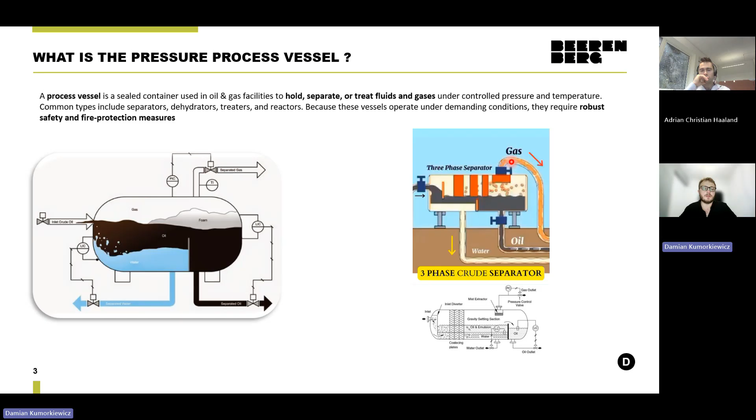Common devices include separators, dehydrators, treaters, and reactors. Because these process vessels operate under certain conditions, they require safety and fire protection measures, very often also with thermal insulation performance.

So how is the vessel made up? In general, either a process vessel or sphere contains a number of items. The main component, of course, is the shell. The shell in general holds the primary pressure boundary and is the largest area of the vessel. From two ends you have a head or end closure, and those components are normally much more complicated because of the curvature, so it's a more complex geometry.

The vessels also contain a number of nozzles and flanges, which are connecting points for upcoming piping and flanges and other interfaces, and for manway entries the vessel contains manways or manholes.

So in these particular items, removability is very important, since from time to time the vessel needs to be cleaned.

Other components structurally support the vessel itself - whether it's vertical, horizontal, or a sphere - we need to use either saddles, skirts, or supporting legs. Saddles are normally used for horizontal vessels, while skirts and support legs are used for vertical vessels or spheres respectively. There are also a number of other internal components, like lifting lugs, ladders, and others.

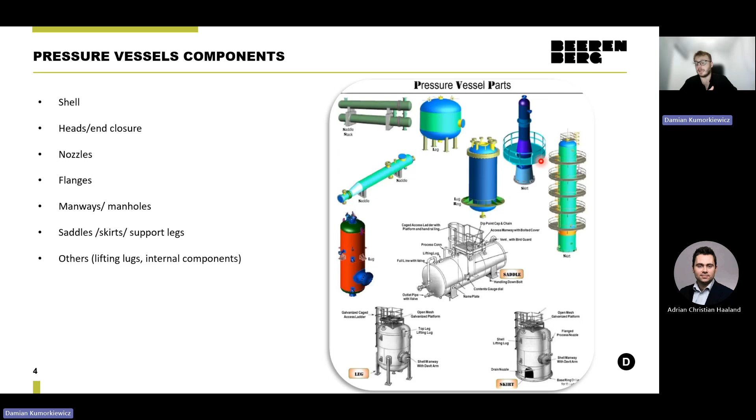Where are these vessels placed in oil and gas facilities? In general, as you know, the oil and gas facility scope is really broad - we have upstream, midstream, and downstream. So there are a number of different applications for the vessel depending on the process the facility operates.

But in general, for refineries and petrochemical facilities, these are normally cracking units, polymerization vessels, aromatics units, and others going through gas treatment and gas processing facilities. There are amine vessels, mercury removal units, and LPG, LNG bullet tanks and spheres.

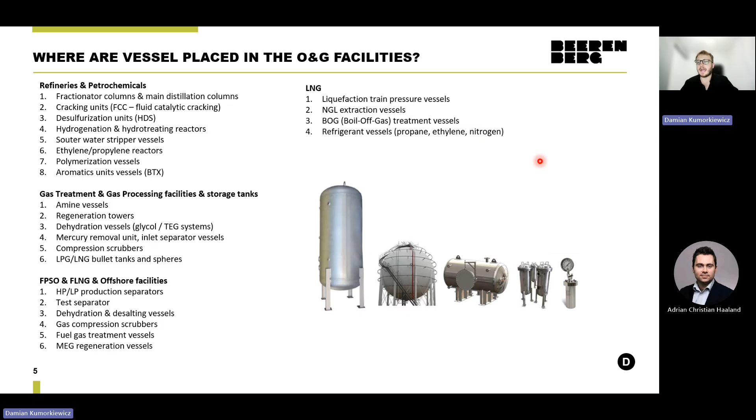Then offshore, this is floaters and offshore platforms - the most common vessels are low pressure and high pressure production separators, test separators, and scrubbers. And the last thing is LNG facilities, where the vessels are normally liquefaction vessels, boil-off gas treatment vessels, and others.

Now, why do we use passive fire protection on critical vessels first? As a starting point, the vessel needs to be in a fire zone, which is nominated by performing risk assessment studies by safety engineers, or if the project follows the API 2218 standards.

But in general, vessels and spheres need overall passive fire protection, because due to the gas containment these vessels are especially at risk from hydrocarbon fire exposure. And if active fire protection fails - which is another type of solution compared to passive fire protection - the heat can cause the vessel's contents to boil and expand in a boiling liquid expanding vapor explosion.

We'll touch on this in more detail in the next slide. Damage caused by the resulting fireball and flying debris can be devastating for the project, so this is a really serious threat.

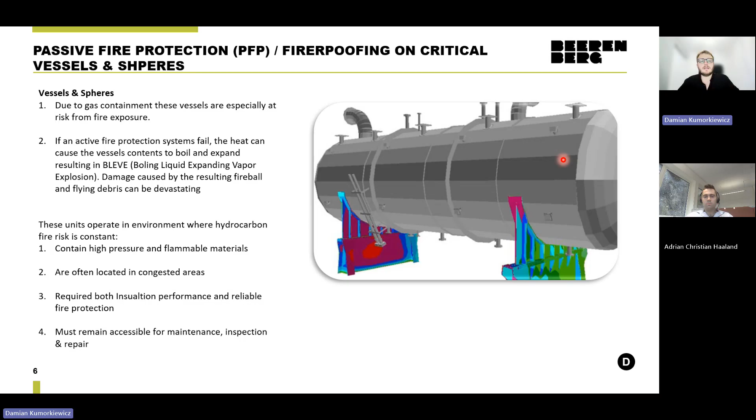So in general, as a summary, these vessels contain high pressure and flammable materials and are often in a congested area, especially in the offshore environment. Very often the passive fire protection material is supposed to be both a PFP material and an insulation material at the same time, and must be made accessible for maintenance, inspection, and repair.

Yeah, so that's the example of boiling liquid expanding vapor explosion.

So as a couple of basic phenomena, it's worth starting with what the boiling point actually is. Boiling point is the temperature at which liquid becomes gas throughout.

Number two, the boiling liquid expanding vapor explosion is caused by a rupture of the vessel containing pressurized liquids above its boiling point. So when the vessel fails, the pressure drops immediately, and the hot liquid boils, generating a large formation of vapor.

And due to this, if the material is flammable, it can create a large fireball and cause very big damage to the surrounding area. So this is a really serious threat.

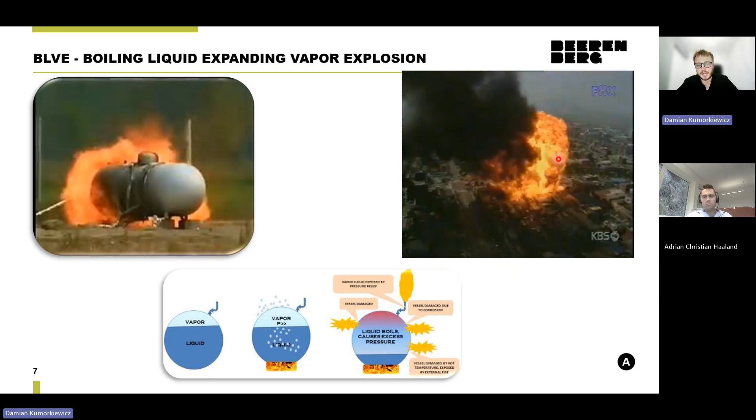We would like to show you one of the many fire incidents in our industry. This is one of the most dramatic. It comes from 1984, November. It happened in one of the LPG storage terminals in Mexico City, Mexico.

As a result, 600 people killed, 7,000 people injured, 200,000 people evacuated, and the terminal was completely destroyed. The end user lost a lot of reputation.

Governmental agencies, of course, being involved. It brought a lot of attention from the media. So it was really, very, very bad event for our industry, and of course for those people, either neighbors or people who have been harmfully affected.

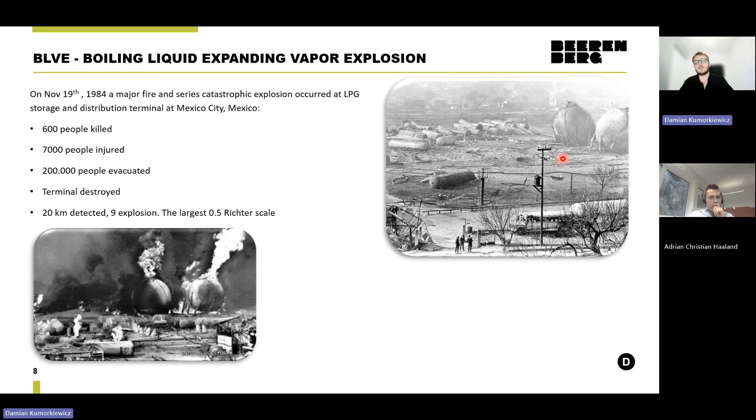So yeah, this is not a coincidence. This is one of the examples which happened in our industry.

Okay, so going forward, what's our typical traditional method for PFP on the pressure vessel? I think this is the good starting point before we move into the Benarx system. So you can divide those solutions into two categories: one is dynamic, and the second is static.

Static passive fire protection materials are like cellular glass shells, which is a rigid product, closed cell insulation material, together with metallic jacketing, for example 316 or 304 stainless steel.

The other solution is PFP jackets, also used many times in the industry for PFP of the vessel. It's made from technical fabrics, and filled with a thermal insulation material as a fire insulation material, which is mineral wool, fiberglass, AES wool blanket, and similar.

The last one is ceramic wool fire insulation. It's quite flexible as well, and it has to be applied on the vessel together with metallic jacketing.

Another type is, of course, the dynamic PFP materials like intumescent coating, the epoxy intumescent coating. It's applied on site by the applicator. It's swelling when it contacts fire, creating a black insulation char, and it's very often used by the offshore industry.

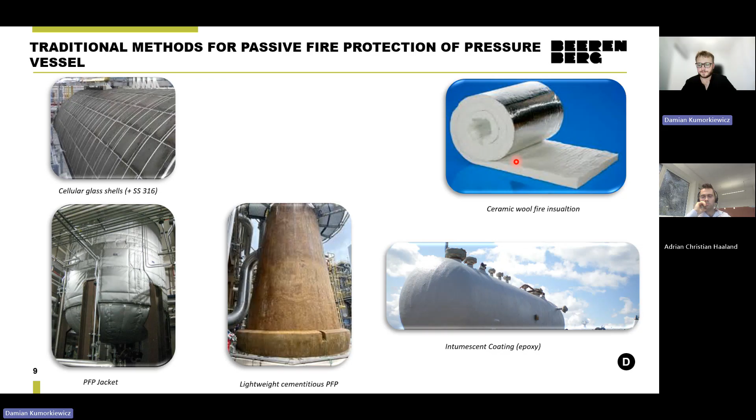So yeah, you have many different systems now on the market. Each solution has pros and cons. But what we see, based on our experience, is first of all corrosion under insulation, a big topic in our industry, in our discipline.

There are a number of locations on the vessel which are susceptible to corrosion, and it could be, for example, the saddles as one example.

Then a congested area, especially in the offshore environment, there's very little space in the production area. There's a lot of surrounding equipment like ladders, decks, etc.

We also see the pressure vessel lifetime is expected to be designed for 15, 20 years. And we see, by the project, they utilize a solution which can withstand only 5 years. So of course, in that logic, the PFP system will be one of the first components to be repaired and undergo maintenance at the first turnaround or shutdown.

Impact resistance: of course, during the shutdown there is a lot of hassle, scaffolding, people stepping in and out, laying heavy equipment, everything is in a hurry. So of course the PFP might be damaged. It's worth taking into account these conditions too.

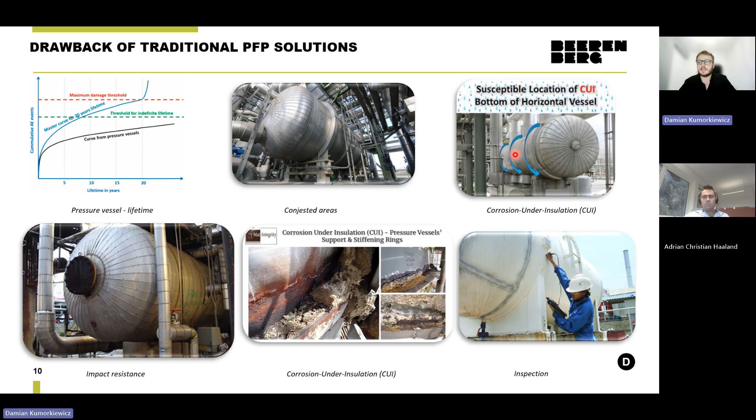So this is our solution. It's called Benarx Epoxy Panel. How is it made? It's made from a perforated plate, stainless steel 316.

Then it's covered with an epoxy intumescent coating, which is calculated based on your fire demand criteria. And then it's applied with epoxy primer and polyurethane top coat on top of that.

And then from the inner side, we attach an aerogel blanket called Oryza aerogel blanket. It's pre-cut, laminated with aluminum foil and glued to the inner side of the panel.

The thickness range depends on the PFP specification and rating, but it varies from 8 up to 40 millimeters. The weight starts from 11.7 kilograms per square meter, but it's directly connected to the thickness. Of course, the higher the thickness, the higher weight is expected.

Surface temperature, in theory, we don't have any limit. We can even go up to 650 Celsius degrees, but that's very, very rare. With one layer of aerogel blanket inside our panel, the surface temperature is up to 250 Celsius degrees, so it covers most cases in the industry. We see that vessels are normally rated up to 200, 220 Celsius degrees.

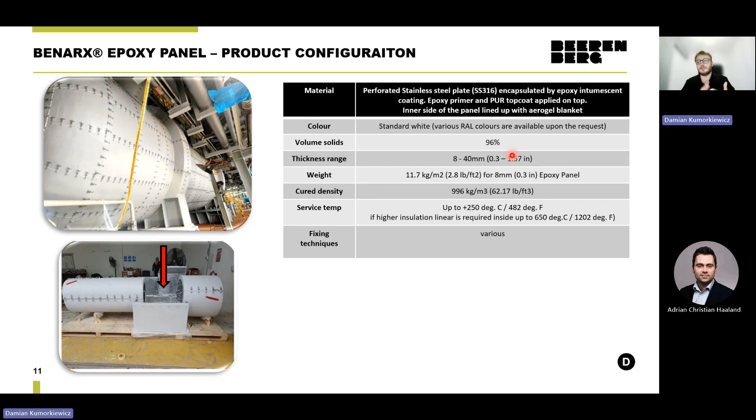Fixing methods depend on accessibility, whether the client wants frequent access, etc., and what's most practical for the installation. But it's locks, banding, pop rivets, or a combination of them.

Since the aerogel blanket is an internal component of our system, I think it's worth mentioning a few words about it. We use this aerogel blanket insulation material, which is hydrophobic, a water repellent insulation blanket. So it's very, very good.

It can be used as a standalone product for hot conservation and acoustic insulation, or cold conservation for the vessel. So if you have any of this demand, feel free to contact us, and I'm sure we will be able to help you. It's widely tested and certified.

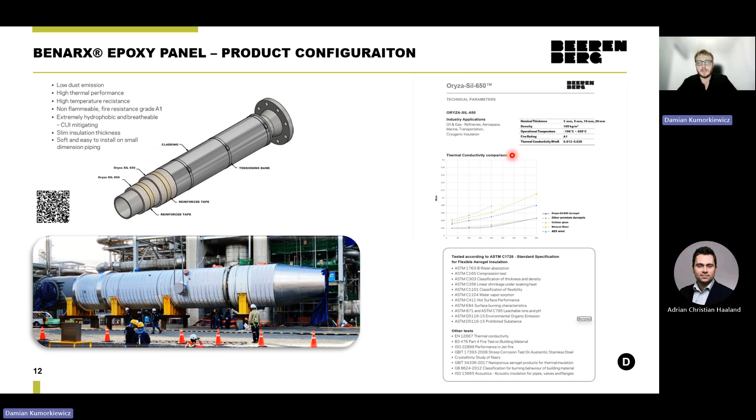Here you have a list of the certifications as well. It's manufactured in many different thickness variations: 3, 5, 10, and 20 millimeters. This isn't a major topic for the webinar, but we think it's worth mentioning.

So what are the details of the fabrication process? It's not rocket science fabrication. In general, when we start the fabrication, we start with a skeleton, making it according to the object shape.

Then we apply the epoxy intumescent coating according to the relevant thickness. We apply the epoxy primer and polyurethane top coat with a roller inside. And then it needs to be dried, packed, and shipped to the client. That's the whole process.

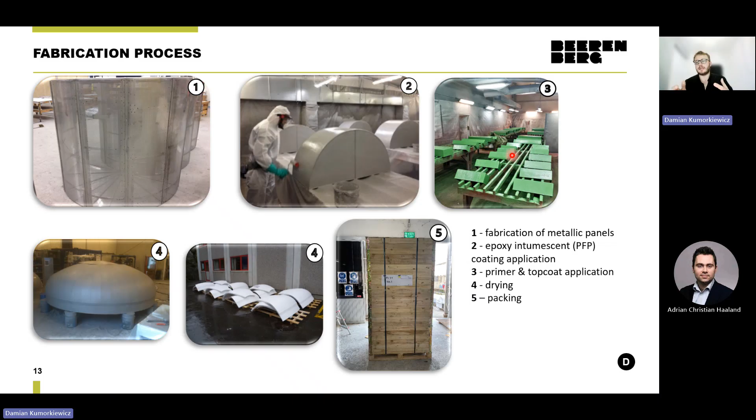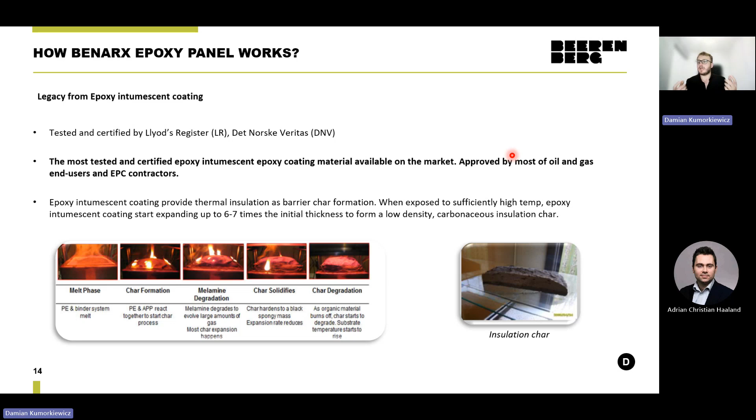How does our panel work? In overall, if you're familiar with how epoxy intumescent coating works, then you know how our panels work basically. We use Chartek as an epoxy intumescent coating, so our panel works exactly the same manner. In contact with fire, it starts reacting, expanding, creating the black insulation char. We protect the equipment against the fire.

Next, product configuration. We have a number of components which can be attached to the product, but not all of them are mandatory. We use them when necessary. First, air gap—that's a small distance between the metallic substrate and our panels.

For example, a 20 millimeter air gap. It's a great solution against corrosion because water will not be trapped between the panel and the metallic substrate. It always goes to the bottom of the vessel and will be drained out from the system by fire-rated drain plugs.

Then Teflon spacer, together with supporting rings. Sometimes we need to attach supporting rings, which are mechanically fixed around the vessel, so no welding. We do this especially for vertical vessels, so we need to attach the panel somehow to the vessel using these supporting rings with Teflon spacers.

Watershed, yes, it will allow water to run off. Each panel section is equipped with a tag plate. We can incorporate the inspection hatch in any panel location. The bottom section of the panels is always equipped with fire-rated drain plugs, which drain water out from the system.

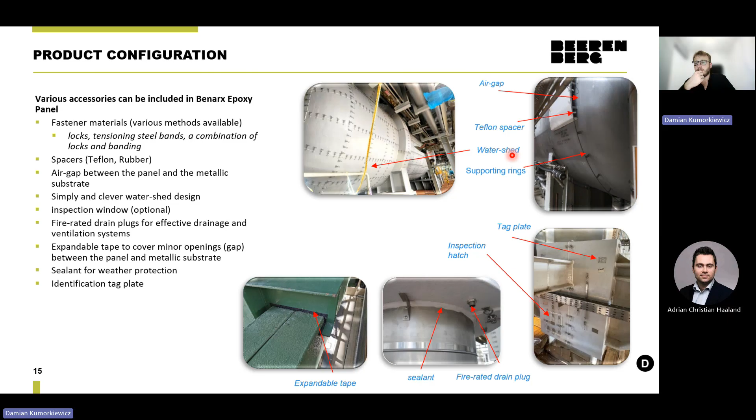Between the panel sections, it will be sealed. The joints will be sealed with a recommended sealant, and any minor gaps between the panels, up to 5 millimeters, will be filled with expandable tape.

Since we already explained a little bit how the vessels are made up, we would like to show you how our product fits into those vessel components. Here you have an example of panels on the tank shell. Then you have the epoxy box, which is exactly the same product as a panel, just with different geometry on the saddles, on the sliding saddles. Then you have the nozzles and the manholes.

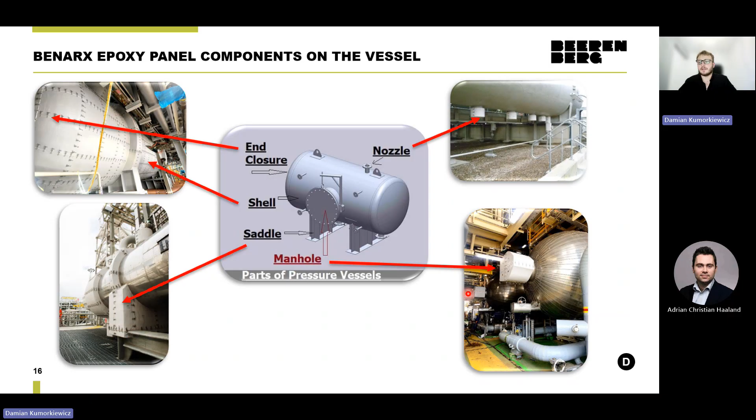What might be your additional questions? Why do we have several parts? In general, we have certain factors we need to follow when we design those panels. The number of sections or panels depends on the fireproofing thickness, based on the application, based on the weight restriction, based on the surface area to be insulated, based on the accessibility. So there are a number of factors we need to follow.

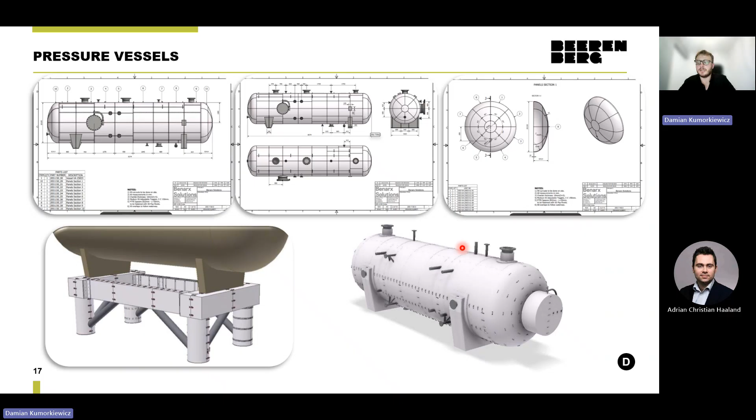Our standard weight restriction is 25 kilograms per segment or per section. If you have a lower demand, for example 20 kg per part, then of course we can follow that, but we need to increase a little bit the number of sections in total. The part will be smaller, but there will be more quantity of those panels.

So especially for large vessels, you need to take into account the wind speed and additional conditions. So we normally use supporting rings around them, which are mechanically fixed to the vessel, and between the rings and the vessel there's a Teflon spacer, and then we attach the panel.

So it's a very similar fixing method to what you use, for example, to insulate a vertical vessel with mineral wool. You need to use the supporting ring as well. So, yeah.

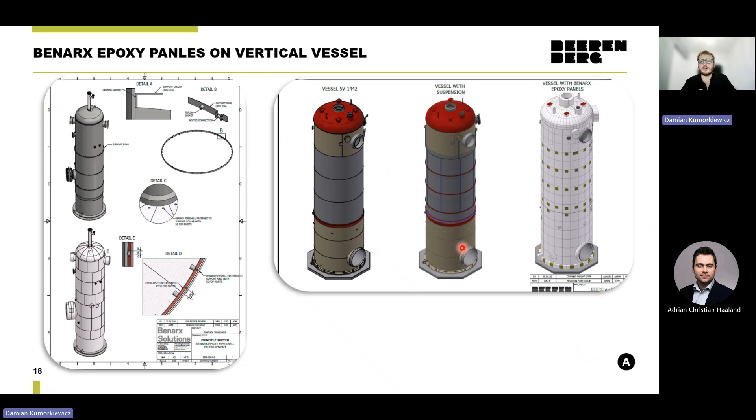All right, Adrian. Yes. So I will talk a little bit about the testing and certification that we do for our products. Why do we do it?

Well, first of all, it's our license to operate. We are not permitted to deliver our products in most projects without appropriate fire testing and certification. Number two, we always invest to improve our products, reduce thickness, reduce weight, reduce cost, reduce installation time and TCO for the clients. Here's a short list of some of the testing that we do for our Benarx series products.

For hydrocarbon fire, we typically test according to BS 476 and IMO 754. We've also done some GOST and TR testing historically. Of course, one of the more recognized standards, UL 1709, we have testing and certifications up to above 3 hours. We've also done fire stream hose tests, which we will come back to a little bit later.

And then we have our jet fire testing, both regular according to ISO 22899 and high heat flux, so-called 350 kilowatt tests. We've also done some sporadic testing within cellulosic fire for building fires. We've done explosion testing. The presentation says 1.2 bar, but we recently did testing up to 8 bar there. So we are quite advanced on that front.

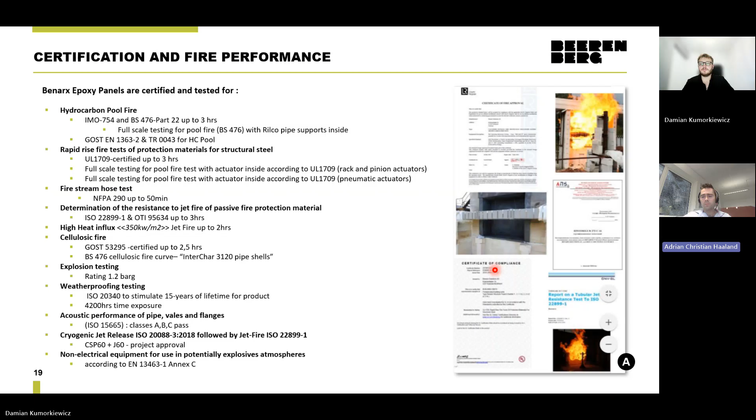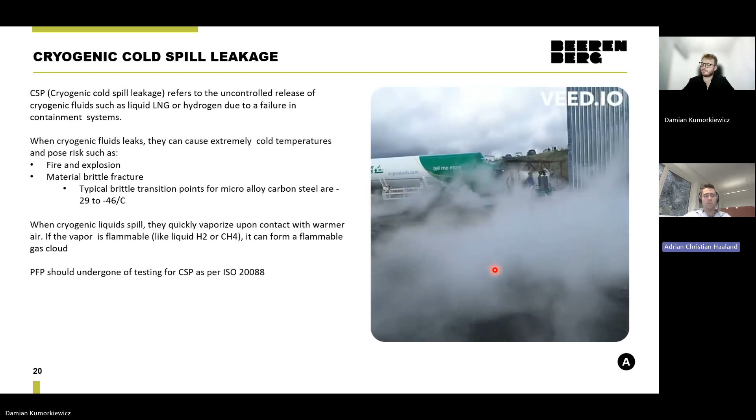Here's an example, a short video taken from outside the test facility during one of our previous cryogenic tests. For one such test, we are utilizing almost a full tanker of liquid nitrogen, and this can also be done with hydrogen if needed. The specimen is subjected to a jet of liquid nitrogen, typically for 1 hour.

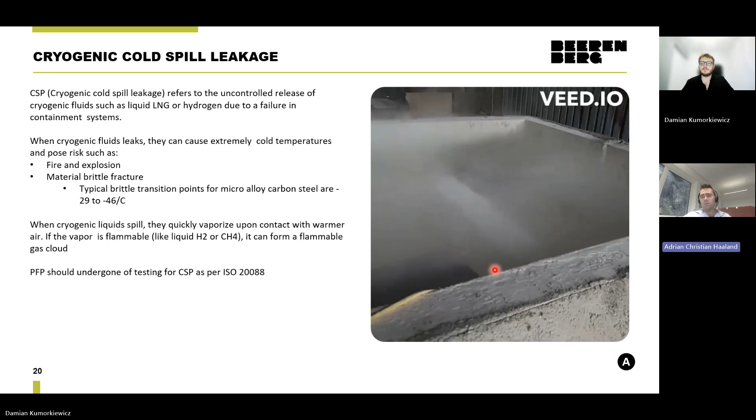It's exposed to temperatures down to -200, and after 10 to 15 minutes of completing this cryogenic test, it is subjected directly into jet fire, going straight up to 1100 degrees and completely engulfed in flames.

Why do we do these tests? This test is meant to address the concern that a spill of liquid natural gas will cool the steel temperature below its brittle transition point, to the point where the metal can actually be subjected to brittle cracking or failure due to the cold temperature when exposed to shocks and other loads. Yeah, next slide.

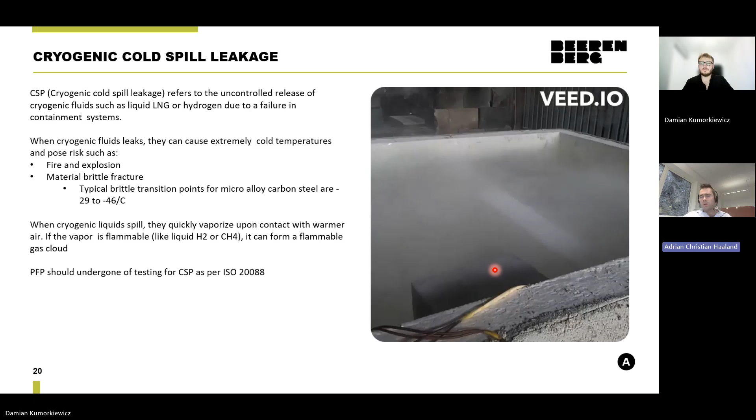When it's detonated in the back end, the pressure wave builds up, and typically the more congested these process areas are, the higher the pressure will build up. So the more complexities, piping, flanges, valves, structures and obstructions you have in the process facility, the more the turbulent flow of gases will mix and the higher the explosion pressure will build up.

The test specimens are located at the end, and they have to withstand this explosion load, both the impact and the subsequent drag load.

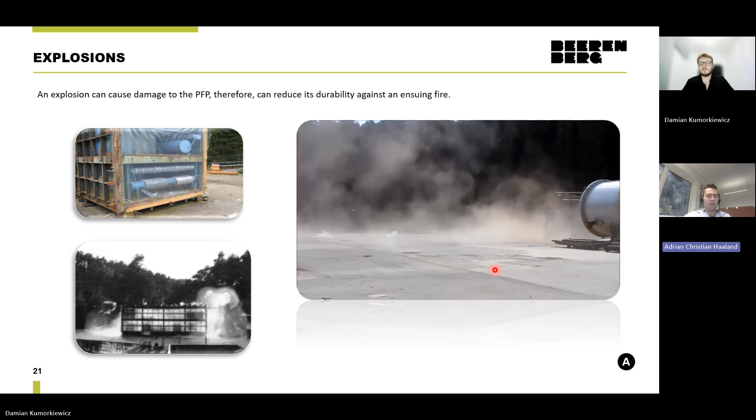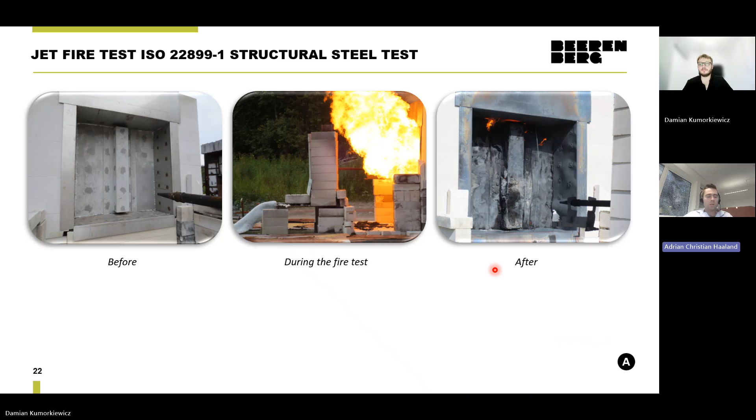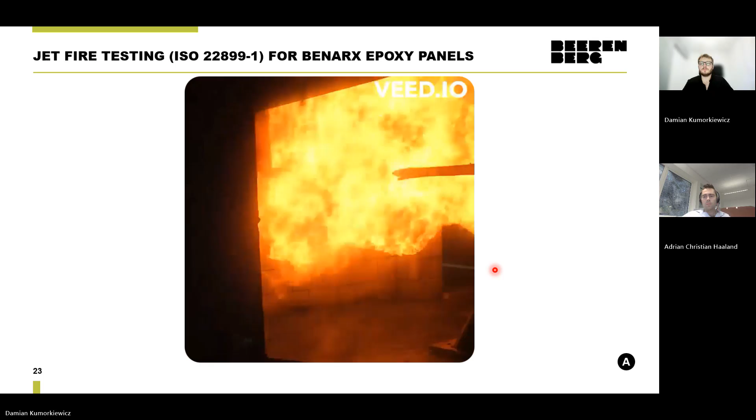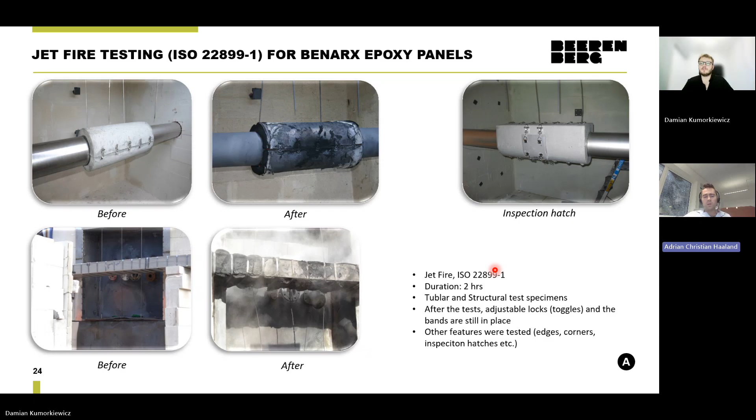And on the bottom here, you can see an example of a cable tray configuration test where we actually run electrically charged wires inside the cable tray to see that they could withstand the rated current during the fire scenario.

For this test, we used 7 tons of liquid nitrogen. That's 2/3 of a full tanker truck. And after 1 hour of this frost inferno, it's going straight into the jet fire. And it has to withstand.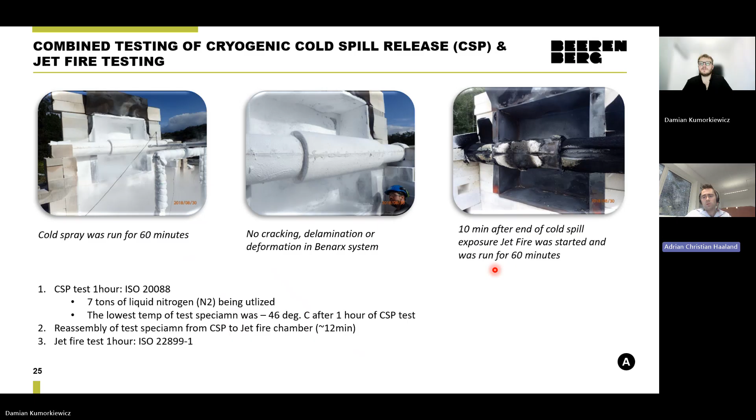It cannot fall apart, crack, or delaminate. It has to prove integrity for the full fire duration. In this case, the jet fire test was run for 1 hour, but we've run for up to 3 hours of jet fire testing subsequent to 60 minutes of cryogenic exposure.

Yet another test, CSP and jet fire test. This was for the thick pipe specimen, so up to 40 millimeter. And we also do thin specimens. This was part of a test program for Chartek 2218.

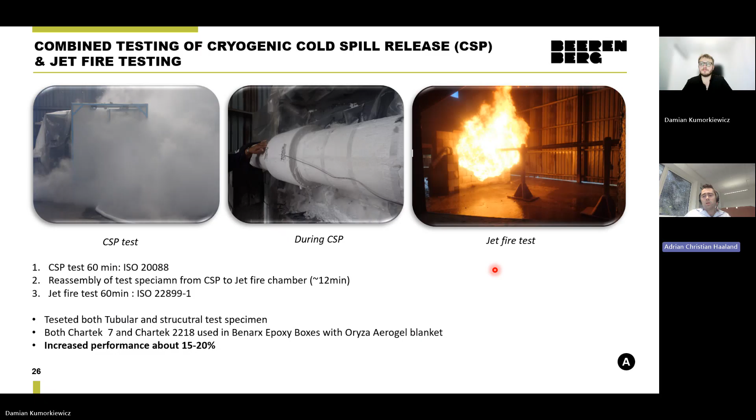The goal of the test program was several factors, but one, to transition into a boric acid-free system, which is an HSE concern for some operators. Also to reduce costs by going into more efficient technologies, reducing thickness and complexity and cost of the system. Due to the thickness reduction and the higher distance between lots and bands tested, we achieved almost a 20% reduction in cost for the product just by transitioning Chartek technology.

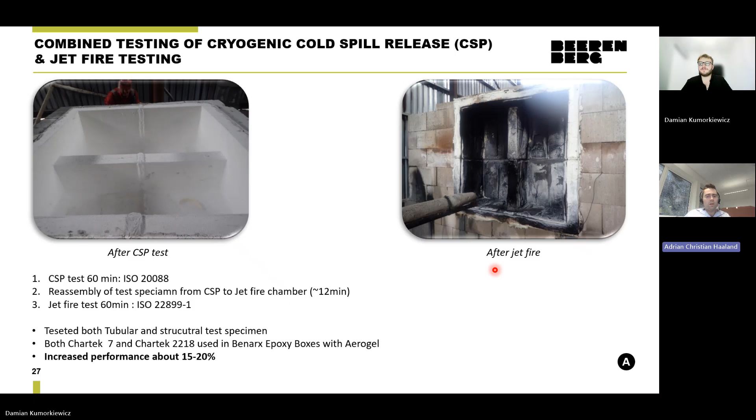This is for the same program, just for the structural specimens. Here as well, 60 minutes subjected to the liquid nitrogen, and then 60 minutes of jet fire in this case.

New member of our test reports, the stream hose test. This is quite a new standard for us, I would say, even though it's been a couple of years now. It's an American type test designed to simulate the effect of an impinging fireman hose on the specimen.

So in the case of fire, there might be cases where water cannons or active fire measures may be taken. The purpose of the test is to see that the impingement of the fire hose water jet does not compromise the system mid-fire scenario. So in the test, we're doing 20 minutes of jet fire, 10 minutes of water hose spray, and then another 20 minutes of jet fire. The system has to withstand the water spray without cracking due to thermal shock or that type of thing.

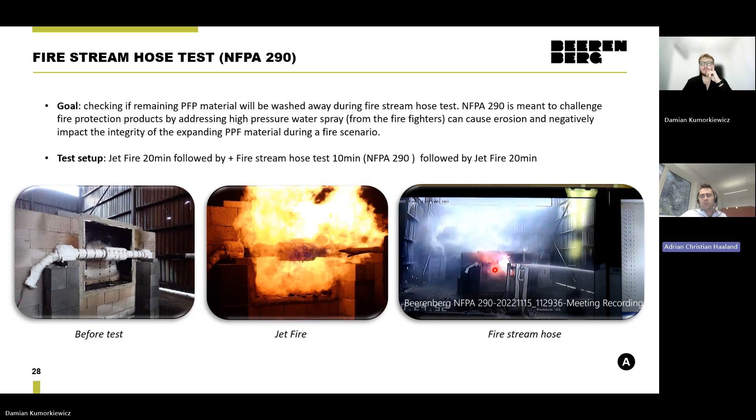The thing to note here is that even though you have a product that can withstand a regular jet fire, the 100 to 200 degree hotter temperature normally encountered in a 350 kilowatt jet fire test actually represents something like a 50% increase in heat flux.

So we've seen fixing materials that stood 2-3 hours in a regular jet fire be burned away in the course of 15 or 30 minutes.

In some cases, these tests reach temperatures above the melting point of certain stainless steels. So it's on the edge of what a system can do, and you cannot extrapolate from regular jet fire testing to this type of test. They have to be performed on their own merit.

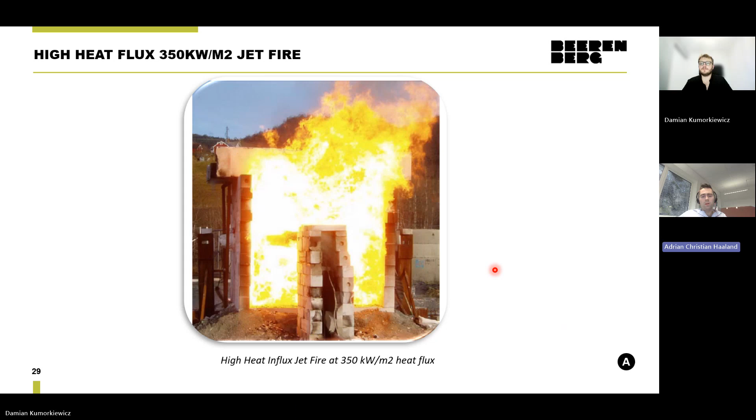Some examples of cyclic testing, weather exposure tests, to explore different types of coating systems and sealants and see how they perform when subjected to UV light, rain, salt, and cycling temperature.

We've also done some testing on repair systems. The concept here is that we've tested damaged PFP encapsulated by our system, so that in the case that you have damage, cracking, or delaminating PFP, from a fire protection standpoint, you don't actually need to remove it before installing the Benarx epoxy system.

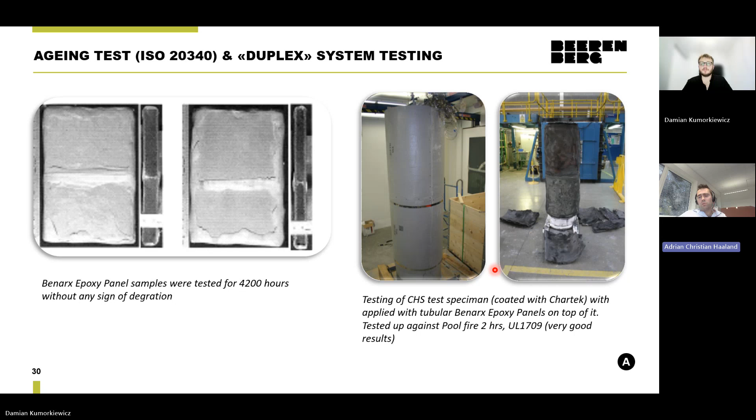You only need to remove them if you have concern about corrosion. If the corrosion protection primer and integrity of the system is good, you can actually just clamp on panels and boxes and avoid the chiseling and removal of the wet applied system.

There's a lot of documentation that goes into deliveries like this, a lot of design, a lot of engineering. We supply our standard documentation package as a default. It includes data sheets, installation manual, drawings, PFP thickness reports and certificates for the projects, weight reports, certificate of conformance, and packing list.

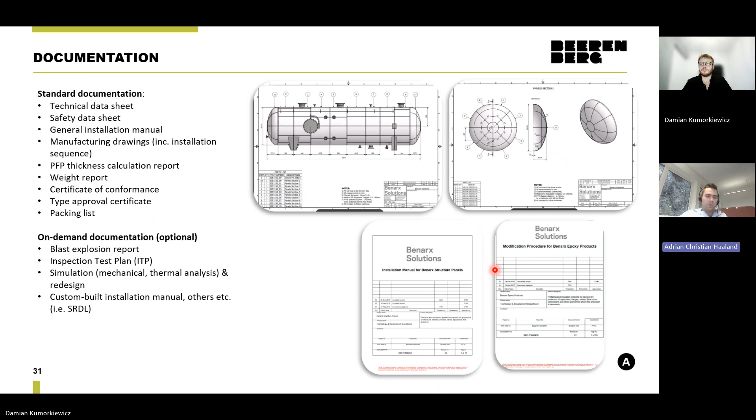Of course, many new build yards have much more extensive requirements for documentation, which is required from the project, and we follow those if they are required. But of course, they have an additional engineering cost in terms of hours. So we would like to recommend keeping it simple if possible.

In the design, we also do some explosion testing for those cases where explosion loads are concerned. Different boxes and panels have different sizes, supporting mechanisms, shapes and geometries.

So we run finite element analysis to address that. The explosion load that we run in our tests is adequately captured in the strength of the geometry that we deliver in the project. Here you have some examples of a vessel skirt and a pressure vessel.

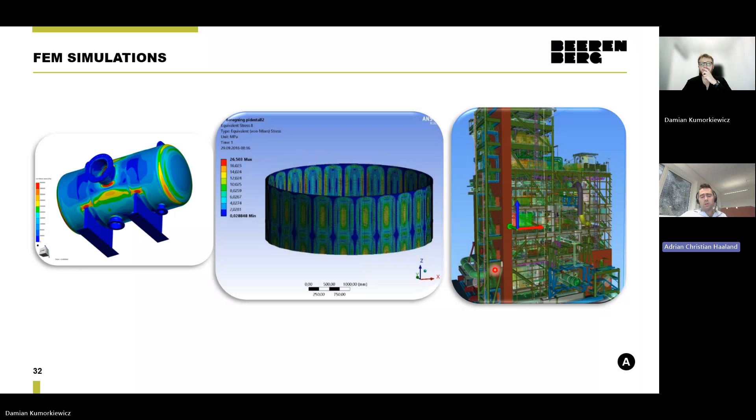Thank you very much, Adrian, for your engineering and technical walkthrough. Now we can briefly explain how we deliver our products.

It starts with design methods, which we'll touch on in detail in the next slide. But when it's defined and we measure or design based on the 3D model, then we start doing the PFP thickness calculation. We start preparing the agreed project documentation. Once everything is in line, production, inspection, then we ship.

The installation also needs to be agreed. Normally we see clients prefer to use local workers so they can easily install our product. Sometimes we are requested to supply the field supervisor. If everything is installed correctly according to the deadline, then we sign the papers.

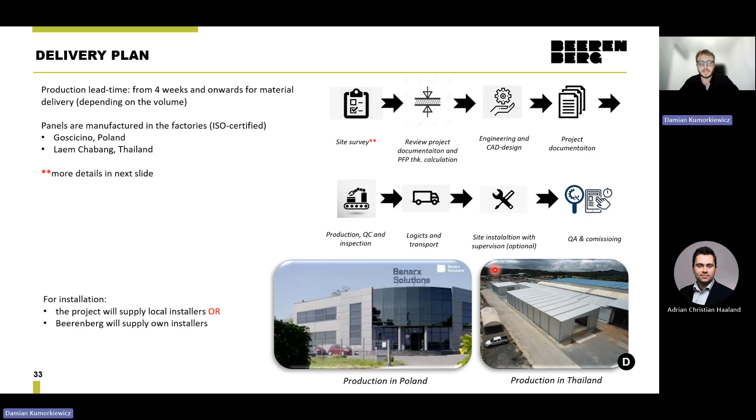On the bottom of this slide, you can see photos of our factories. One is in Poland, and the second is in Thailand. So we are prepared to supply demanding volumes with quite tight delivery dates. This is for us bread and butter.

When it comes to the design methods, as partially mentioned in the previous slide, we have a number of solutions, so we will not leave you alone.

In general, we can utilize certain models. First of all, we can design those panels based on 3D models, like from your Navisworks. We see the correctness and quality of the 3D models improve every year. This is not like 10, 15 years ago when a valve was represented by a rectangle, for example. Now they've become really, really good and accurate 3D models.

It could also be 3D scans, either from the client or from our side. It could be point clouds. It could be field measurements or just structure drawings with site pictures.

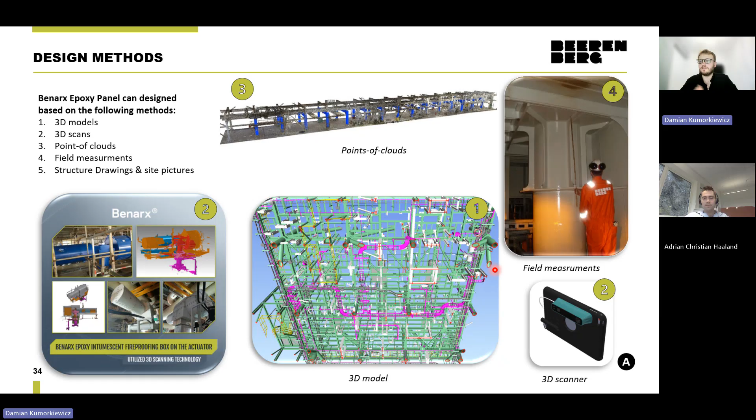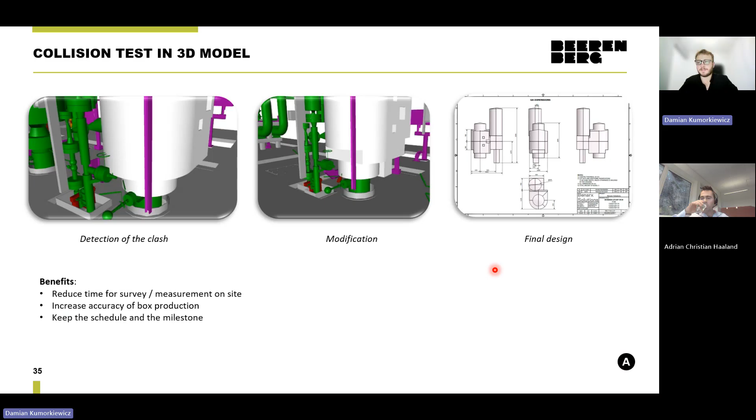We can also do the collision test in your 3D model, or we can send you the 3D model of our panels, and you can incorporate it into your 3D model. We are flexible, but the goal is to detect any clashes, especially for offshore projects that are concerned about that, because they're concerned about the PFP thickness, the weight, if it fits into the very congested area with very little space.

Except for the material delivery, of course, we are able and prepared to provide you the service capability. We have a number of models.

We can send you a field surveyor still, despite it being a traditional method. It works pretty well for complex scopes, for large vessels, for example. It's just easier sometimes to send a guy and measure it on site and discuss all of the nearly impossible scope of work.

For some projects, we can also supply our labor, our installers. However, we see the bigger and bigger trend that projects prefer to use the local manpower component, not just because of the price, but also because of local content usage requirements by a government. So we are definitely able to help you with this as well.

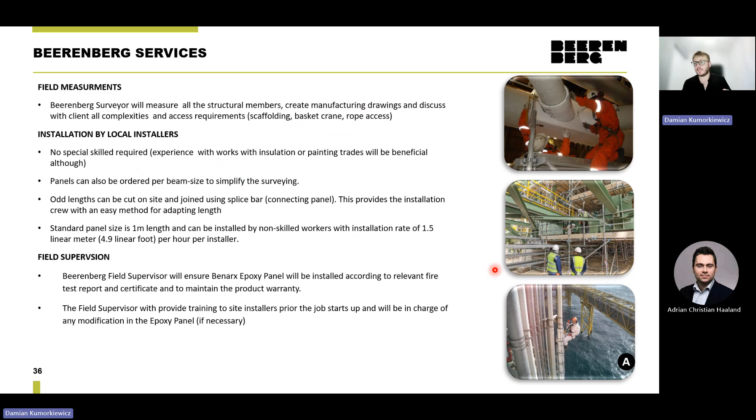And we are quite often requested to supply the field supervisor. The field supervisor will train the local workers, and also the end user workers. The supervisor will supervise the ongoing works, and in case of any modification to be done on site, that person will be in charge of this activity.

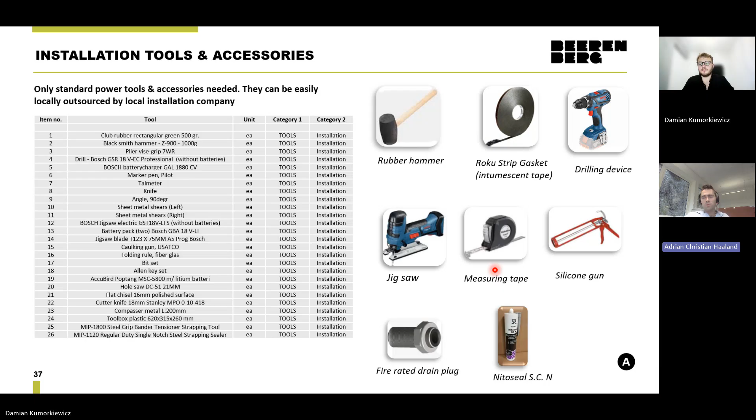We have different models. As Damian said, we are flexible, so we can either supply the full installer toolbox for the project, so you will get all the tools pre-packed and ready, or we have cases where the client wants to procure the tools locally, maybe due to import restrictions or local content requirements, and we can provide a list and supplier names of tools advised. So if the client wants to do it themselves or if we should send the tools, we can do both.

One concept that I would like to elaborate on a little bit in the installation part is the flat pack panel. We have had some projects where instead of custom designing and fabricating everything, we're actually sending standard building materials. We're fabricating standard panels, standard angles, standard latches, etc. for the clients, and they will cut on site and adapt to the field conditions.

This might be good if you have a low quality model, so there's a high risk of clash, or in cases where you have large surfaces, you can use the flat panels efficiently. Or on some structural nodes, manholes, nozzles, etc., you can actually fabricate boxes on site without the need for surveying. This, of course, adds to the work on site compared to the case where everything is pre-designed. But it is a concept you can use if labor is cheap and you don't have a POB concern. It's possible to be quite flexible on the design and get a cheaper material price.

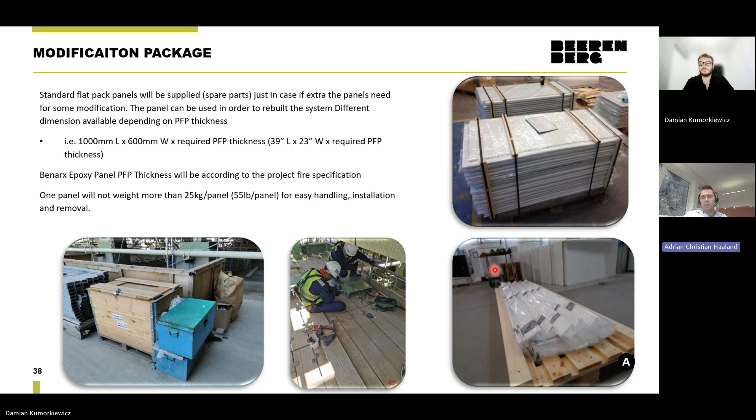All right, thank you, Adrian. If I would be an end user, EPC, or insulation contractor, the most interesting part for me would be the case study, because hopefully we will be able to give you case studies that might solve your potential problems or issues on site. So the first case study is from a gas processing plant in Norway.

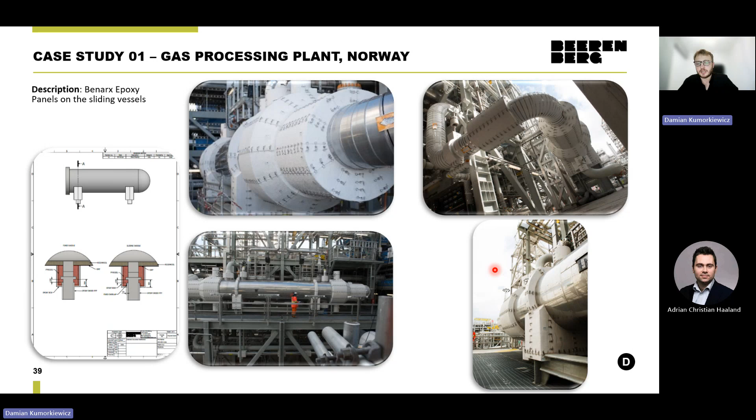We supply the panels of the sliding saddles. As you probably know, sliding saddles have this movement up and down from 5 up to 10 millimeters due to the thermal expansion of the vessel. So we need to accommodate this movement, and we need to make sure that the panel will be big enough to accommodate that movement. Here you have this example where we supply those panels of the sliding saddles and also associated piping with the flanges. The tank shell was fireproofed with a fire insulation material with a metallic jacketing. This is a great example of the hybrid PFP system.

Case study number 2 is for this vertical vessel. The top of the vessel contains the bolted connections, so they need to have access from time to time to this bolt area. That's why they use our box assembly solution on top of that. It was quite a large box, and the remaining area down to the bottom was fireproofed with a wet applied PFP.

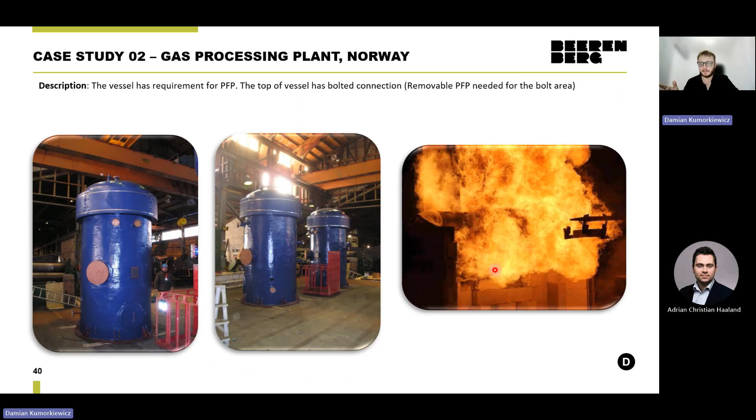This is one of my favorite case studies, a little bit unusual. This is for an offshore platform in Norway. We fireproofed around 60% of the vessel, so only the bottom section of the vessel remained uninsulated. The reason is related to the boil-off gas behavior. When you insulate the entire vessel, the tank becomes too cold, which can produce an excessive amount of boil-off gas. To balance this, the project wanted to keep the bottom section of the vessel uninsulated.

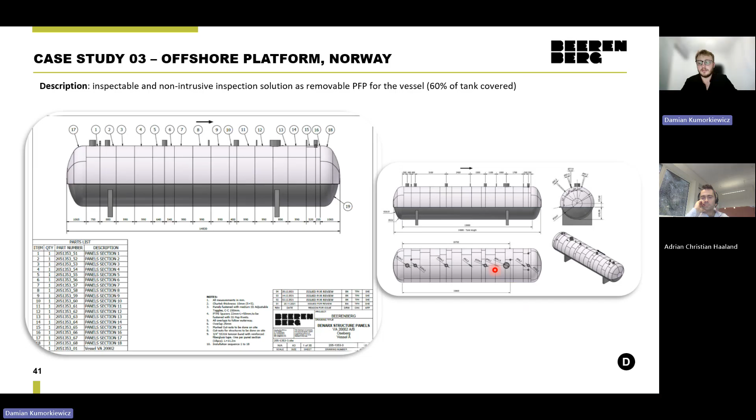So we supply these panels on this markup area of the vessel, and apart from that, on the client side there's very little space, very complex area, tight spaces. It was pretty tight deadline as well to supply our solutions.

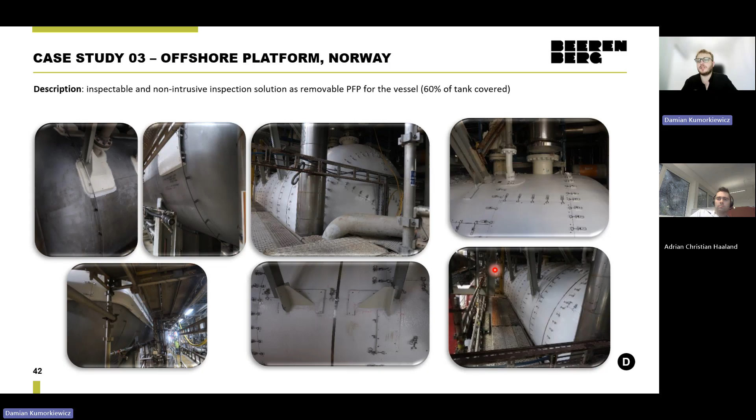This is how the outcome looks like. We had to utilize the supporting rings with the Teflon spacers due to the large vessel. If I remember correctly, the length of the vessel was nearly 15 meters with a diameter over 3 meters. So quite a lot, and the operating service temperature here was around 120 Celsius degrees. We had to do some on-site cuts, openings, and patches to accommodate all these details. Here are remaining photos from that project. Overall, the client was happy.

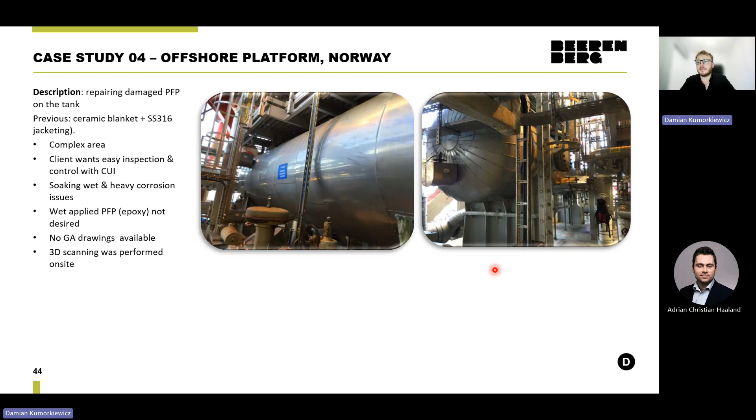Another case study, this time we repair damaged PFP on the vessel. What the client used in the past was ceramic wool insulation with a metallic cladding on top, but it was fully corroded, fully soaked with water, very, very heavy. Once the client removed that, we came into the picture. The small starting issue for us was that the client didn't have drawings - the drawings had just evaporated. So we had to do 3D scanning, and based on this 3D scan, we got the 3D model. Due to the urgency of the scope and potential grit danger for people and machinery, surface treatment with a wet applied PFP was an option the client wanted to avoid, and it was a really complex area.

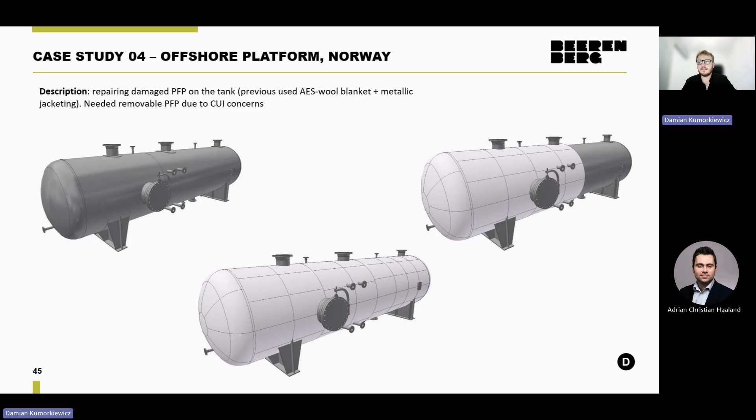So here are our panels on those tanks after the design, and here's a picture after the installation. We managed to fulfill all the expectations, and the client was pleased with the overall performance. Worth mentioning that some sections, like the saddles, we didn't have to fireproof because they'd already been fireproofed with epoxy intumescent coating a long time ago. So here you can see the interfaces too.

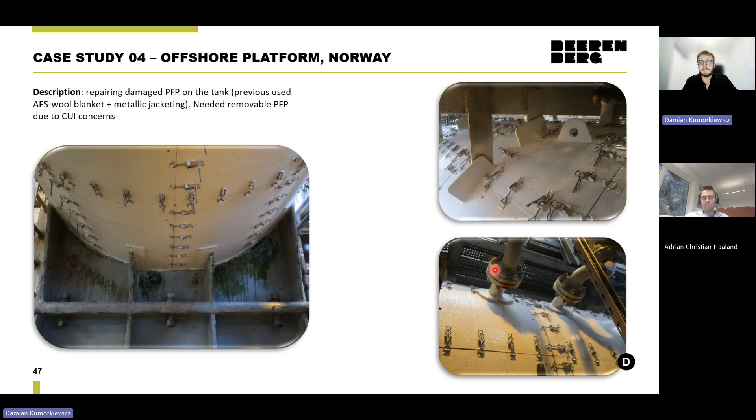Another project, now we are moving to the Netherlands, to the Benelux. We are in a refinery for our good customer. We supply panels on the components called pre-filter and coalescer. Those vessels were already insulated with mineral wool, I think it was 100 millimeters thick if I remember correctly. These vessels also contain heat trace, and heat tracing is vital for process stability, to maintain the temperature, avoid fluctuation, and maintain the viscosity of the fuel they process inside.

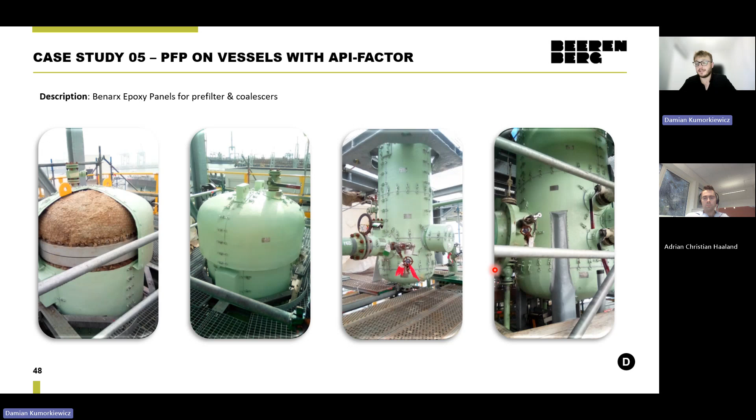Now we are changing continent once again, so we are flying very quickly today. We are in Australia now. So this is the Benarx Epoxy Panels on the bullet tank.

Really large vessel. They have a requirement for high heat flux jet fire, 30 minutes, with a blast requirement of nearly 0.3 bars. Not super high spec, but not so low as well. We fireproof the tank itself together with associated components like the nozzle and the flanges. However, the saddle was fireproofed with epoxy intumescent coating in the yard by the local applicator.

There were a couple of vertical vessels that we needed to fireproof, only the skirt access holes. You can see here nicely on that picture.

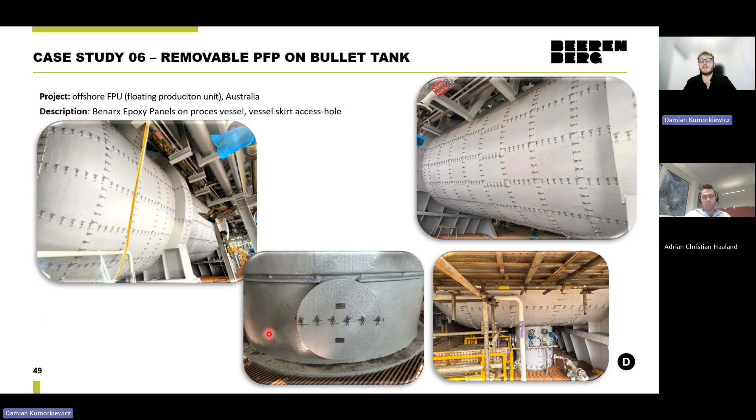The seventh case study is from South Korea for one of the petrochemical facilities. Historically, they used cementitious PFP. I think the thickness was 80 millimeters, if I recall. And it wasn't in good shape, in good condition - it started delaminating and deteriorating. So the end client wanted to fix it as soon as possible.

The area to be fireproofed was 6 meters tall. The diameter of the skirt was around 4 or 5 meters. So we fireproofed this with our panels with only 8 millimeter thickness, the lowest possible thickness we can offer. Successfully delivered and installed.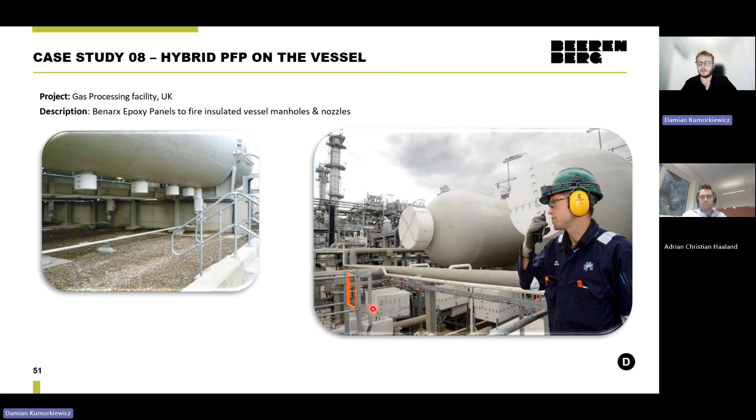As you can see on the left picture here on the top, the vessel itself is insulated with AS wool. It was a significant high operating temperature on this job, so we also had to keep straight in terms of designing all the transition areas to avoid temperature exposure of the epoxy. Of course, the epoxy has a limit on what it can be in direct contact with, so we need to insulate and transition in an appropriate manner to avoid heat ingress.

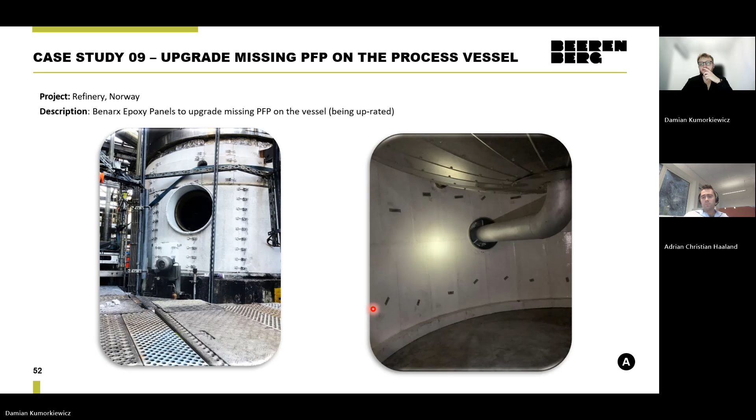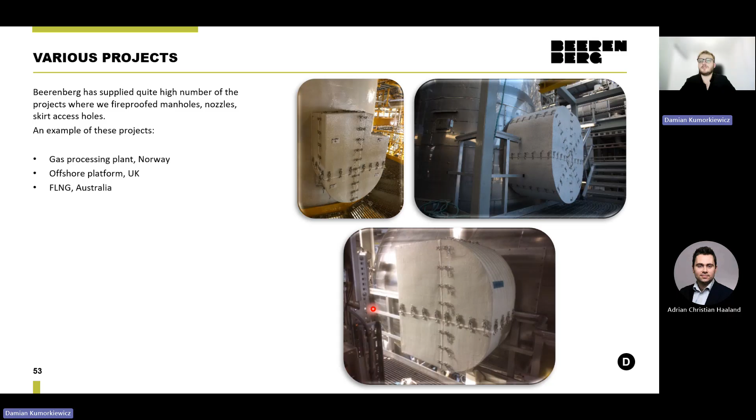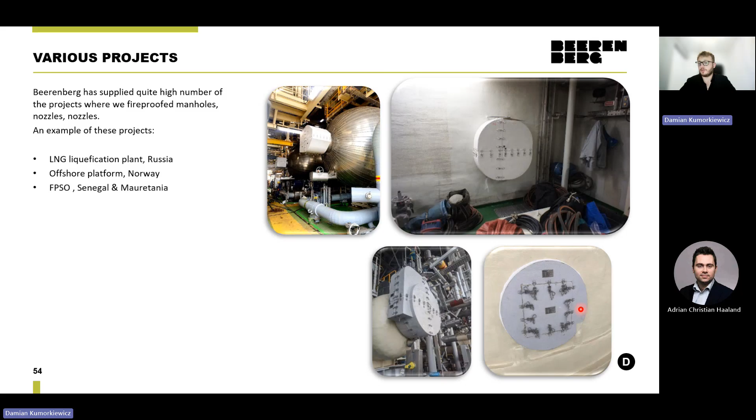Similar cases, this time from an LNG liquefaction plant, offshore platform, FPSO, majority for the PFP of the manhole. Here you have an example of the removable PFP with our boxes on the skirt access holes, and this is a manhole in the bulkhead - slightly different application.

All right, worth also showing how our product will be lasting over time, in a 10, 15, 20 year frame. Of course, this is not easy to get from an end user due to many different requirements like data protection, etc. But we managed to get some site photos of our product after certain years. Maybe not from the vessel, but we would like to show at least what we've got so far, and it represents quite good performance of our product.

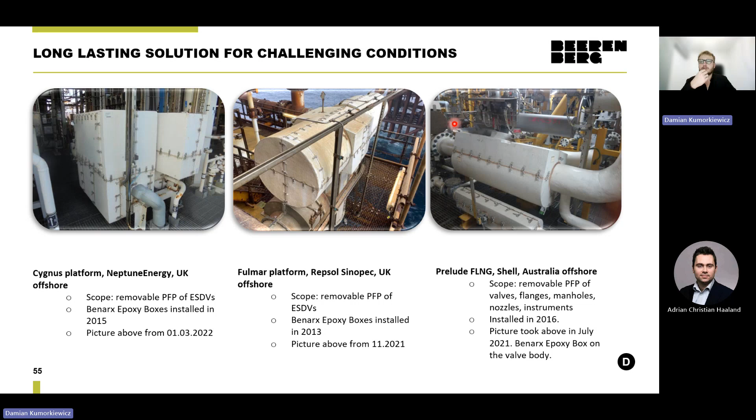So here you have an example of our boxes on an ESDV from UK for an actuator and for valves after 7, 8, and 5 years respectively.

And this time for onshore - previously was offshore, now onshore. We supplied a lot of boxes for this project in 2007 for many different applications, unfortunately not for a vessel. And we have been called to inspect those boxes after 10 years, and this is how it looks like.

We are not telling you that it looks like new from the factory, but taking into account several conditions like different weather for the climate zones - sometimes winter, sometimes sun, temperature variation, multiple shutdowns performed, local impact by human activities over there - we are thinking they are looking pretty okay.

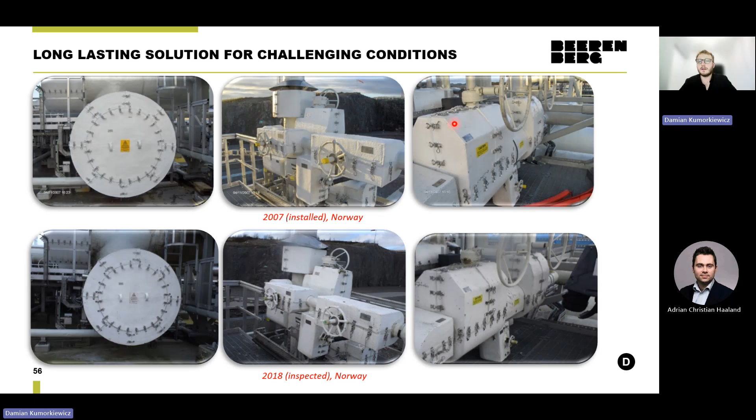Track records are also important for projects that might be interested in our solution. We have a lot of track records, and that's supposed to give enough confidence to potential projects that we are offering the right solutions for the right application.

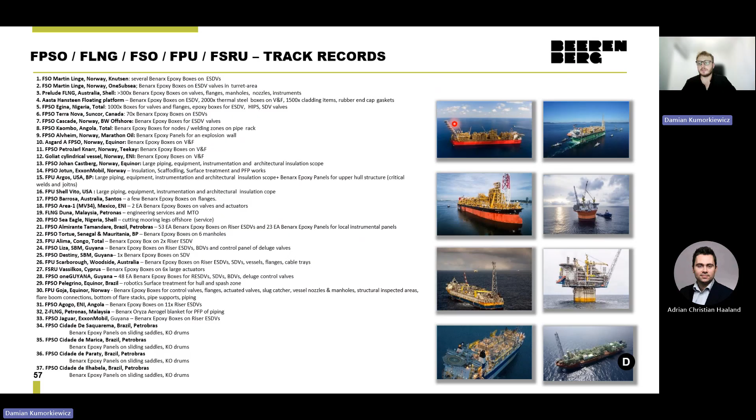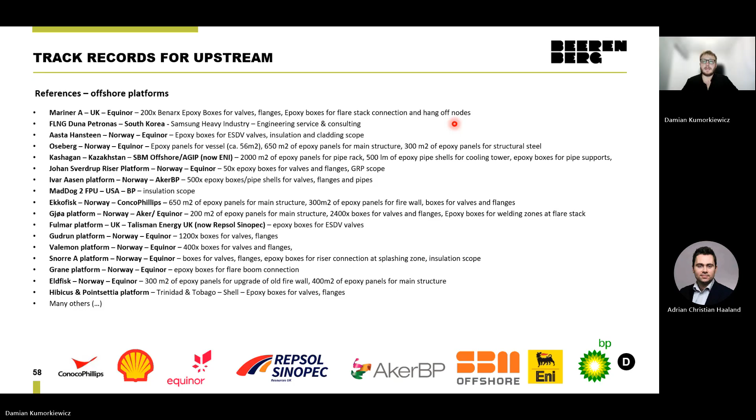For the floater market like FPSO, FLNG, etc., we have over 37 track records for worldwide projects, and track records even longer—it's too little space for the text, unfortunately. We originally come from the offshore sector, so we supplied a lot of our products to offshore platforms worldwide. Onshore, we are also getting stronger.

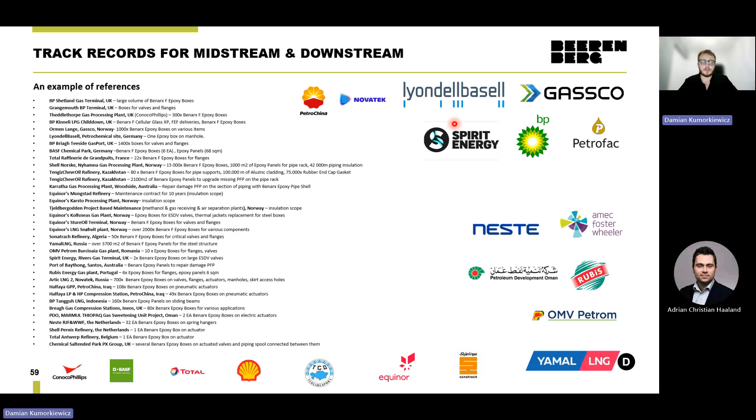According to our internal list, we have over 50 track records for the midstream and downstream, and also for projects in Asia, Australia, Middle East, Africa, Europe, North and South America. So we are placed everywhere. Our solutions are exposed to various weather conditions and they are functioning as intended, which I hope will give you enough confidence to trust in our technology.

But in summary, it's the following: first of all, you don't need to paint, you don't need to make the surface treatment. There is no grit danger for the people and machinery. There are fewer workers on site, so there's less safety risk. That's very important for the offshore sector, but onshore as well.

Basically, what we do is remove the scope of work to be done on site to our factory. So you are eliminating that risk, and we are able to fulfill really tight schedule jobs. Also, the amount of scaffolding and weather protection covers are reduced.

Our solution is fully compatible with any coating systems, like zinc rich primer, polyurethane and acrylic top coat, thermal spray aluminum, or any other thermal insulation solutions. Our product can be installed on top of old, defective PFP if required as well—there's no need to remove that.

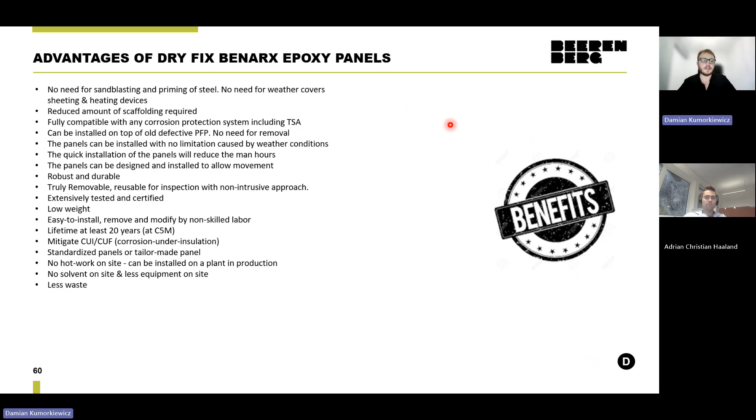It mitigates corrosion under insulation, which is also very important, so it's basically maintenance free. There's no need for hot work, no welding, so it's just cold installation. And there is very little waste during the installation, which is treated as general construction waste.